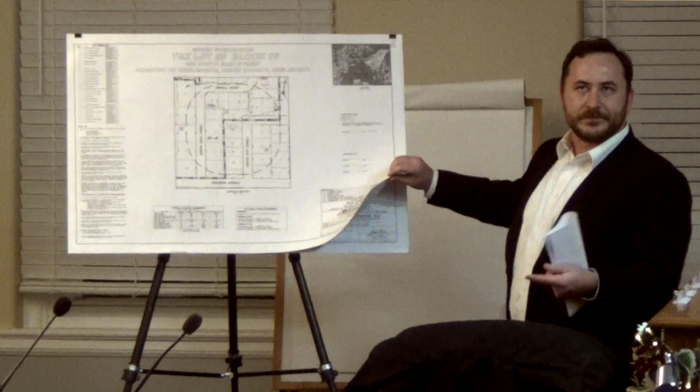As a matter of fact, if you recall last meeting, we didn't really have adequate topo information on that adjoining wall from the neighbor. So I'll touch on that real quick. I'll go to the survey, and that was submitted with the original revised package on the second, so just to quickly touch on it.

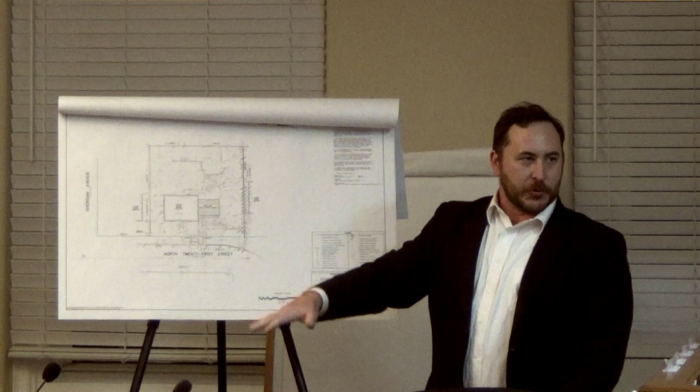You can see here on the right-hand side of the plan, we got a ton of spot shots here. It's a unique wall, it's got a lot of steps to it. See the neighboring property, there's a concrete step shown here, and the wall kind of steps down with it. In general, the wall varies from only a foot high towards the front of the property, with our property on the low side and the neighboring property on the high side. As you continue down towards the rear, it gets up to about 5 feet high, with us on the low side, neighboring property on the high side, until about three-quarters of the way back, the neighbor's property drops off.

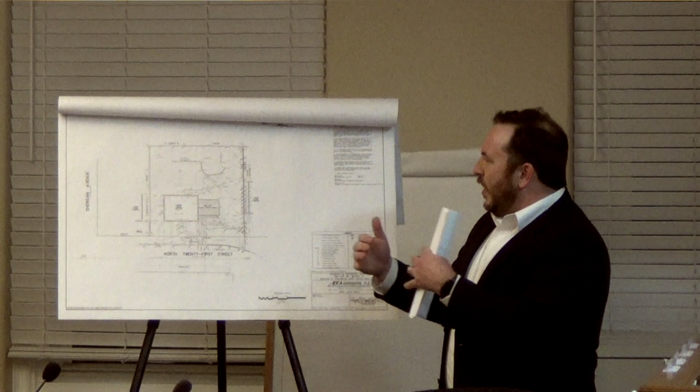And when you come back here, this last about 20, 25 feet, it's actually just about a 5-foot-high freestanding wall. So just to clarify, last time we had assumed, since we were on the low side, that they were just higher—you see a 5-foot wall and figure that's the reason. It's actually freestanding, so we revised our plan based on that fact, and that's why we have our retaining walls up a little bit from the rear of the property, and I'll go into that. But just a little background on how we derived this design.

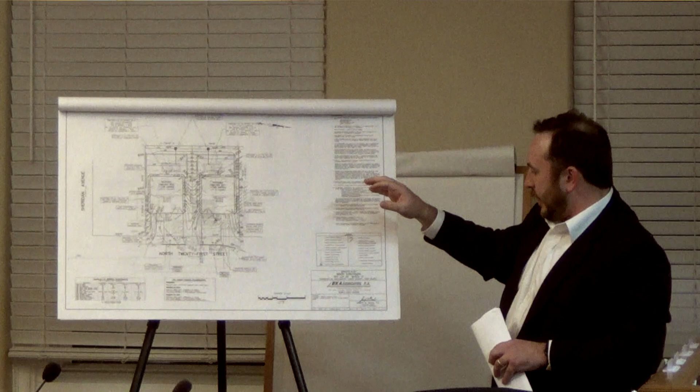So I'll quickly touch on sheet 3 of 4. Again, this was revised January 2nd, so the exhibit revisions are based off of this one. But just to help you guys through the thought process here.

The main changes on this, we did keep the drywells in the back in this iteration. Kind of the thought being, we added these retaining walls on each property, kept them separated here, so you can have water flowing through here and not have to deal with—our thought at the time was a single retaining wall, you'd have to create an HOA. We wanted to avoid doing that, so we kept them separate. With the way the grading works, we tied them back in towards the houses here, as you can see. The thought would be flattening the back area enough that we'd slow down the flow enough.

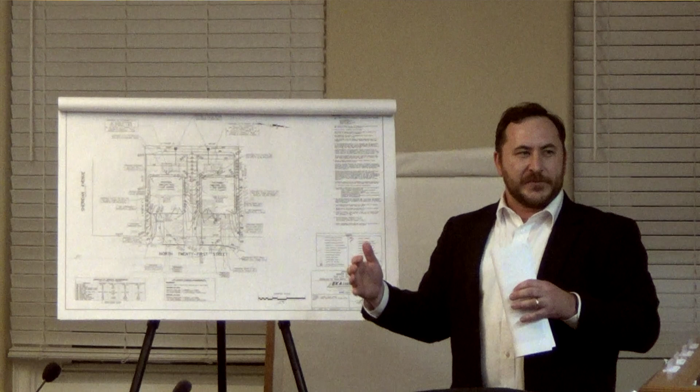After receiving Harbor's review letter and having discussions with Christian, we realized that was inadequate. You still have a lot of slope coming through the middle—it's collecting everything from the front. It's pretty steep here, maxing out at 3 to 1 in some areas, so you still have some decent velocity there. So I'll move to Exhibit A now, A1.

And here's how we initially addressed that. We added a scour hole in the middle, between the two retaining walls, so everything coming through the center of the property will hit that scour hole, slow everything down, and protect the neighbor to the rear. We also terraced the retaining walls, offset 4 to 5 feet from the retaining wall in the rear.

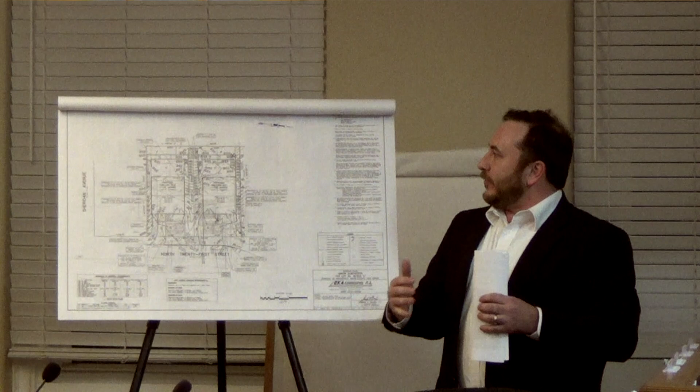So we got 4-foot high max here, then it comes up to about a 2.5-foot retaining wall. A little more, it'll look better for the neighbor in the back, and prevent us from having excessively high retaining walls. A 6-foot high retaining wall isn't very aesthetically pleasing, so lowering that gives more opportunity for landscaping or green area between those two retaining walls.

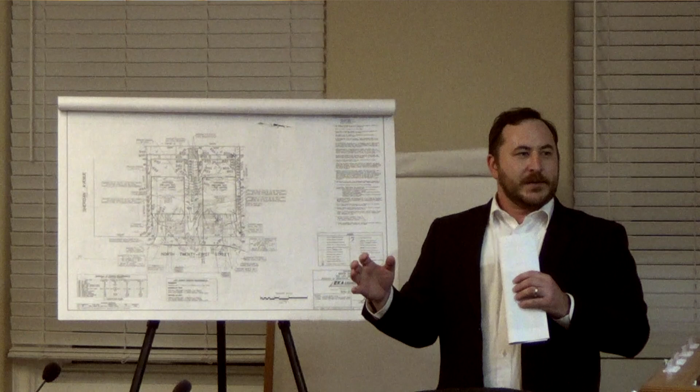Today I spoke with Christian again, and I agree with him. The ideal solution is to have one retaining wall across the back, or in this case terraced, but not have this U shape coming back and creating a channelized section. We wanted to avoid having to deal with an HOA for these. Speaking with Christian, he indicated there's a way to basically have a continuous wall with a separation, so you don't need the HOA.

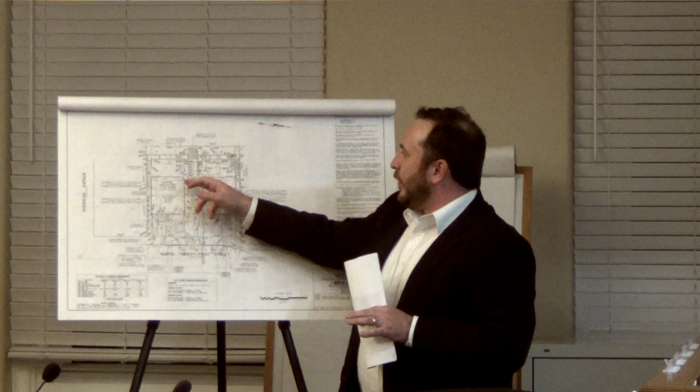So I know you guys are looking for a final design. After speaking with him, as part of resolution compliance, if we were approved, the only change would be to extend these across and have that gap, so it's 2 separate retaining walls, and you don't have this U shape there.

So you're still going to have 2 walls on each property, just straight across property line to property line? Correct. What happens to that grading in the middle? We'll be able to flatten it out, basically. Right now we're getting all the way down to elevation 79, where the scour hole is. If we have a wall there, we don't have to get down that low.

It'll be very similar to the grading on either of these properties, which is once you get down here, you're at 3 to 4%. So you won't have a scour hole, or a smaller one further east up the property line? If you have a wall that goes straight across from left to right, what do you need the scour hole for? No, exactly, we would remove the scour hole.

One of the concerns was the velocity of flow. You can level out this area to a nice 3-4%, that'll slow the water down. It'll be vegetated with grass. That'll slow all that water down going to the rear of the property.

We also moved the dry wells to the front, so you have even less. Previously we had the dry wells in the back, collecting from each house, going to the dry wells, detaining it, then metering it out slowly. So the 2 and 10 year storms were fully contained. The 100-year storm, a little bit was being let out, matching the existing peak runoff. Now that'll be reduced.

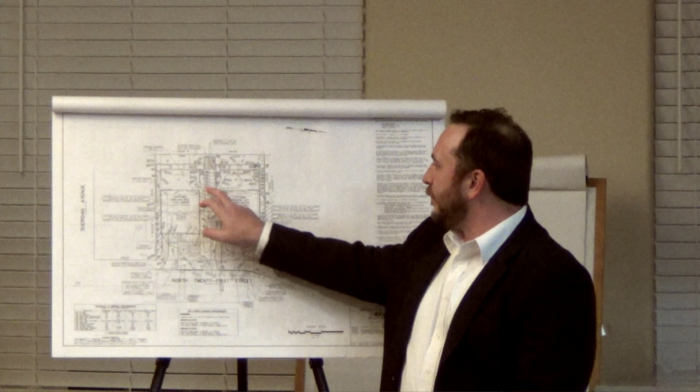They're not currently shown. Currently access would be kind of through here, through that swale.

But how's it gonna be when you put a wall going from here to there? How do I maintain the property on the side of the wall? We'll have to add some steps there, in terms of getting lawn equipment down.

I'm just saying, as in the chairman's scenario, property owners not necessarily getting along, sooner or later the people behind this property are gonna probably say, hey, that looks like shit over there on this side of the property line. I'm just saying, what's it going to look like there?

That's a legal term, right? Okay, we would add stairs on the side so that way they can access the back off the sides.

Again, we're suspect because we don't have everybody. Well, we just didn't know that could happen, connecting but separate. The best way to be connected but separate. Yes, I didn't know that was a thing.

Mr. Grimaldi, I would recommend stairs. In terms of lawn equipment, I personally have an electric mower that's nice and light.

Chairman, Mr. Grimaldi has a question. Again, I'm asking a question because I can't see it, that's all. I can't see it here because it doesn't exist yet.

Robert, why don't you come up closer so we can hear you? I think you'll hear me. Go ahead, let's see what happens. Can you speak up, please?

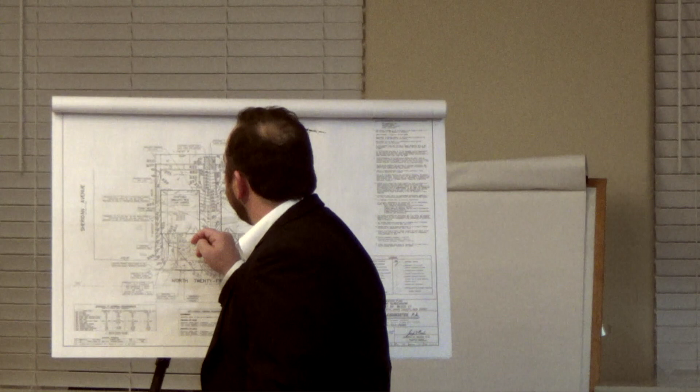Correct, yeah. To the right side, yes, you can get around the first tier of the wall on both sides, though that's maybe a little tough actually, so we'd have to tuck that in. No, I think he means between the house and the wall.

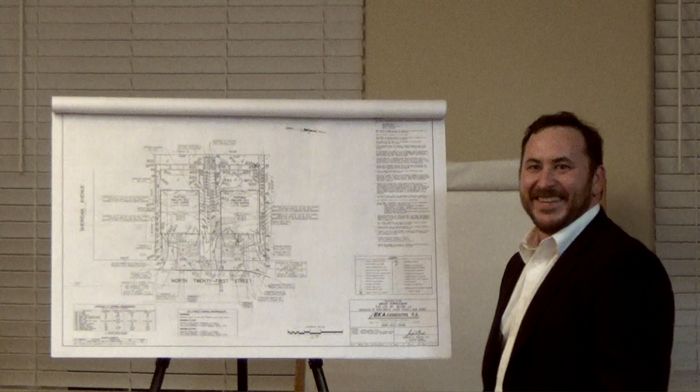Between the corner of the house and the retaining wall, if you don't mind, on the far right side and the far left side. Well, the house is in line with the first retaining wall, so you'll be able to walk around.

He's talking about over here. We'd have to tuck this in a little bit. No, but right now there's one between the walls, yes, I'm sorry.

Over here, you have space between this wall and that wall, so you could get to that tier. Now, getting to that other area would be a problem.

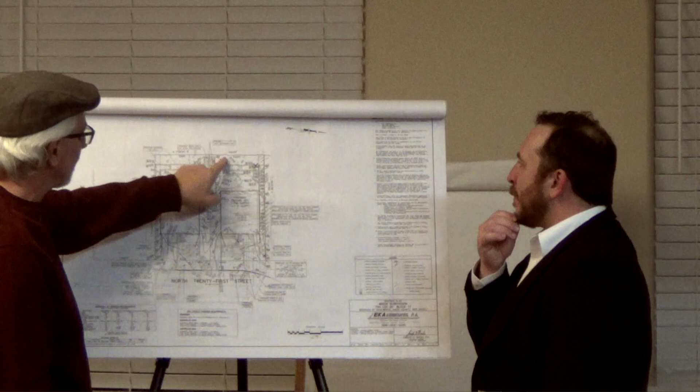But these walls are connected? Yeah, we would only connect them here. Thanks for clarifying that. We would still have kind of the wings on the side.

Whether you follow the chairman's recommendation of an I-beam or you do a return wall and they just butt, they'll be separate walls, so when the hot dog incident happens... That was our main concern, was hot dog related incidents.

With that though, whose tree is it? That's a good question. It is split down the middle.

We could edge it a little bit. Right now it's only a 4-inch caliper tree. Technically it looks like it's on the south side. Well, it's actually the town's tree, it's in the right of way.